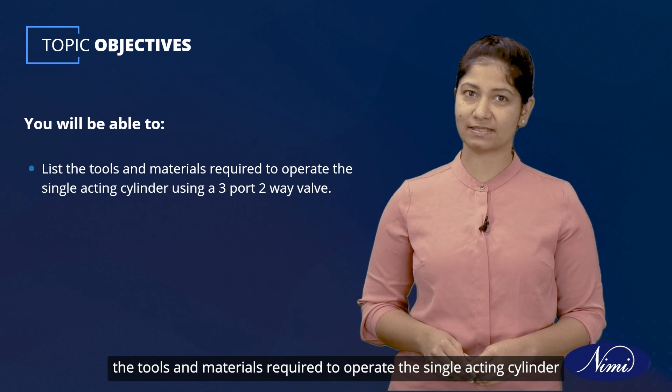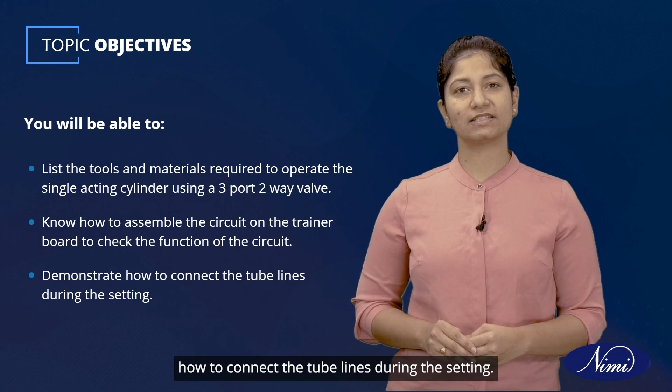Hello, welcome to this session on Construct a circuit for the direction and speed control of a small bore single acting pneumatic cylinder. By the end of this session, you will be able to list the tools and materials required to operate the single acting cylinder using a 3-port two-way valve, know how to assemble the circuit on the trainer board to check the function of the circuit, and demonstrate how to connect the tube lines during the setting.

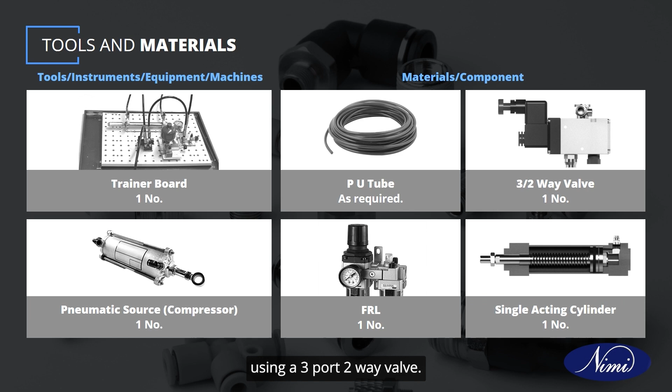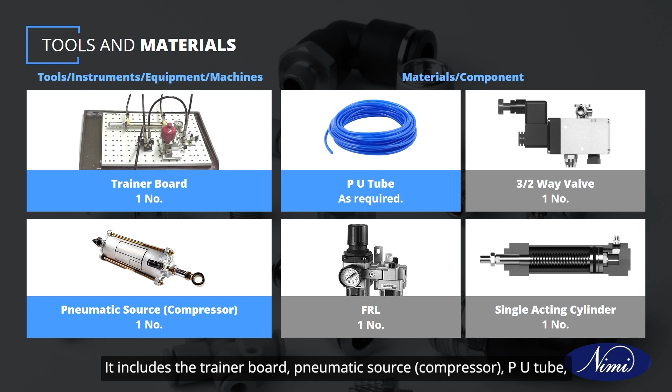Let's now see the tools and materials required to operate the single acting cylinder using a 3-port two-way valve. It includes the trainer board, pneumatic source, compressor, PU tube, FRL unit, 3-port two-way valve, and single acting cylinder.

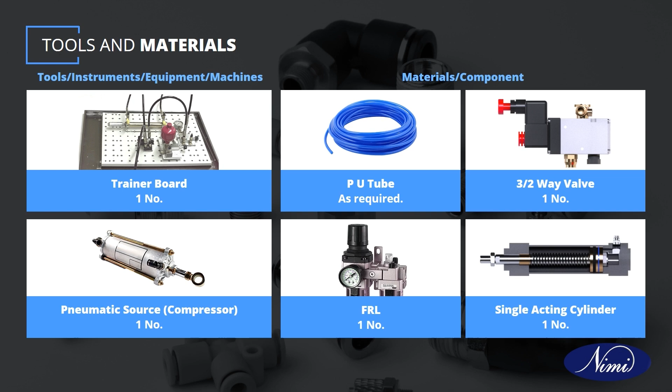To operate the single acting cylinder using a 3-port two-way valve, you need to first arrange the components on the trainer board. For example, arrange the pneumatic source, single acting cylinder, 3-port two-way valve, and FRL. Take a look at the ISO 1219 symbols for the components displayed here.

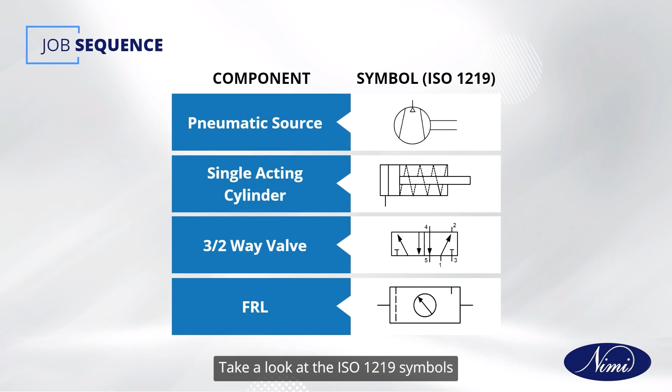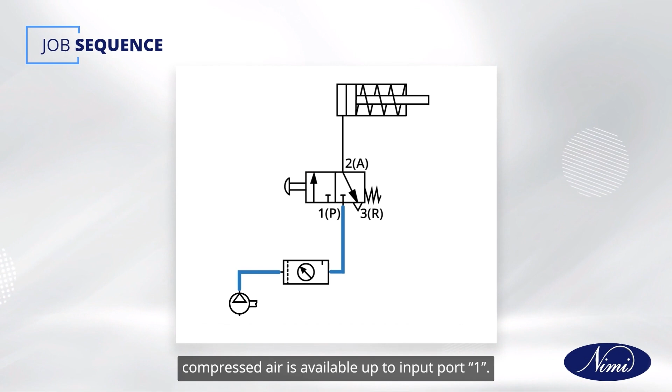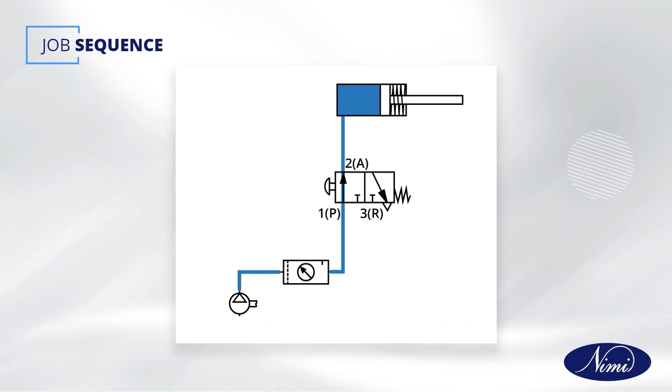Here is the circuit diagram to operate the single acting cylinder using a 3-port two-way valve. When compressor is switched on, compressed air is available up to input port 1. When push button is pressed, direction of air changes due to valve shift. Piston moves forward. When push button is released, piston returns back.

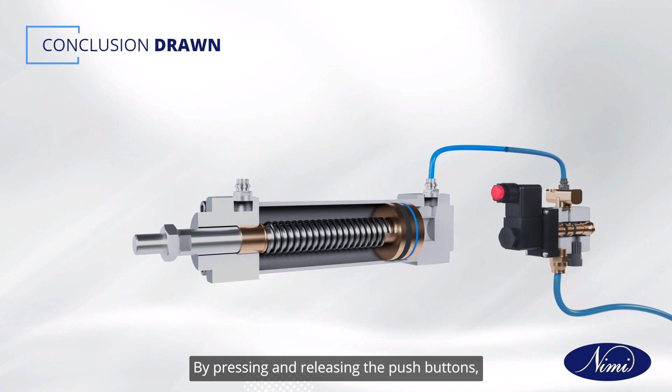Now, to check the function of the circuit, first you need to press the push button. When you press the push button, the piston should move forward. Next, release the push button. When you release the push button, the piston retracts. By pressing and releasing the push buttons, you can check the piston movement and thereby draw a conclusion that the motion of the single acting cylinder can be controlled by a 3-port two-way valve.

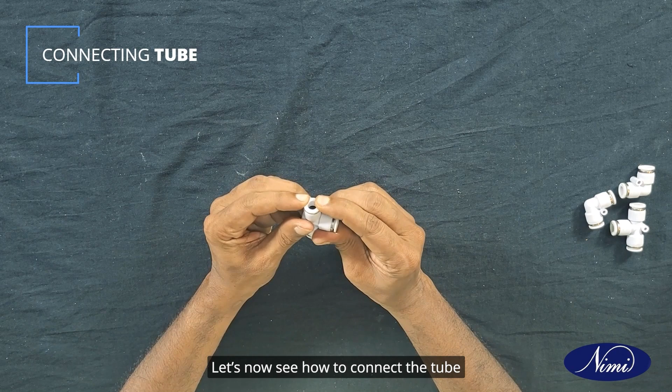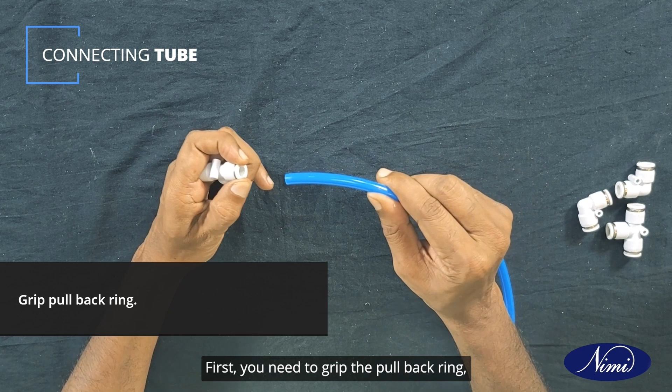Let's now see how to connect the tube using a push-in fitting. First, you need to grip the pullback ring, then push the polyurethane tube into the fitting, and then pull the ring, and finally push the lock ring forward to lock.

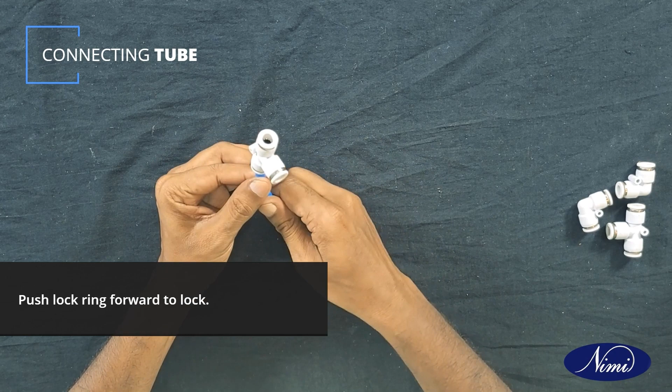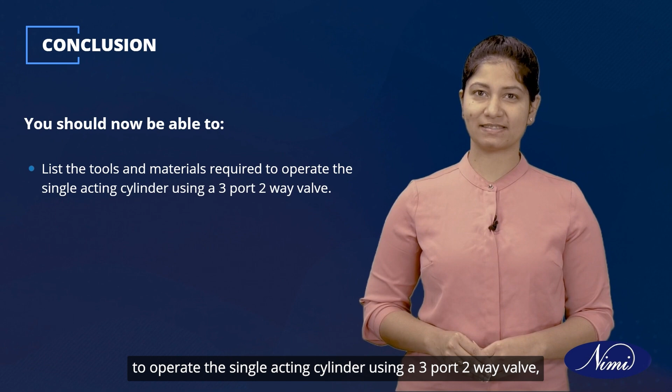We have reached the end of this session on Construct a circuit for the direction and speed control of a small bore single acting pneumatic cylinder. You should now be able to list the tools and materials required to operate the single acting cylinder using a 3-port two-way valve, know how to assemble the circuit on the trainer board to check the function of the circuit, and demonstrate how to connect the tube lines during the setting.